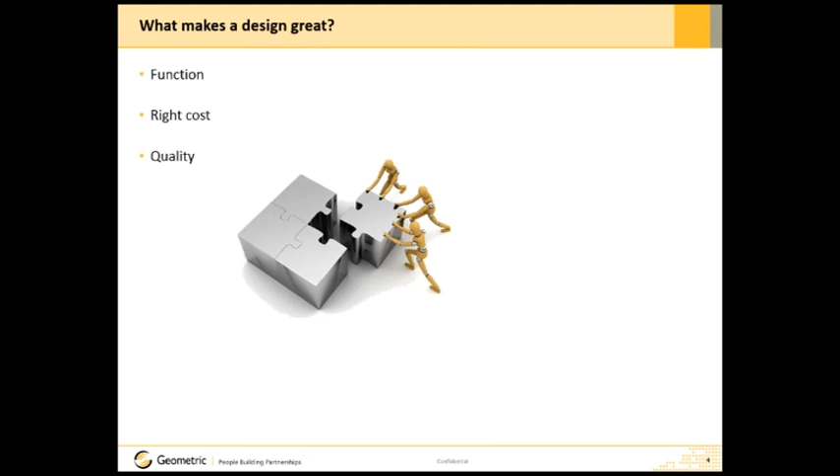Generally, quality is based on perception, but it should also be endorsed by the customer. It should definitely be efficient—better than the existing method, and it should save time. The next aspect is also about safety and things like reliability.

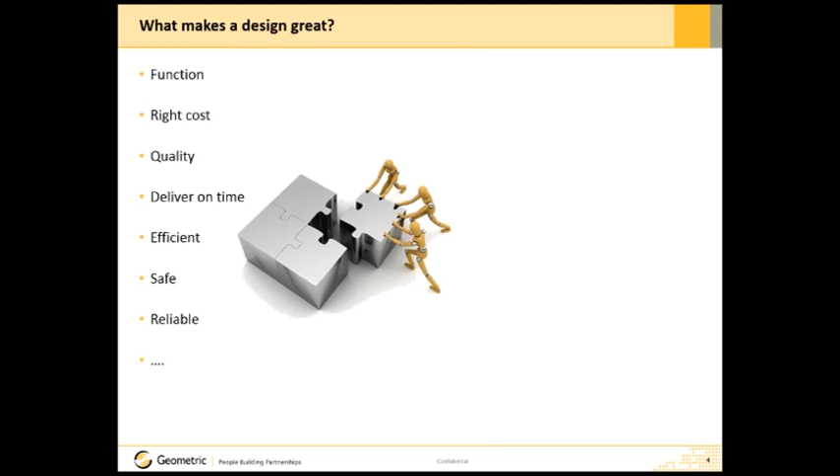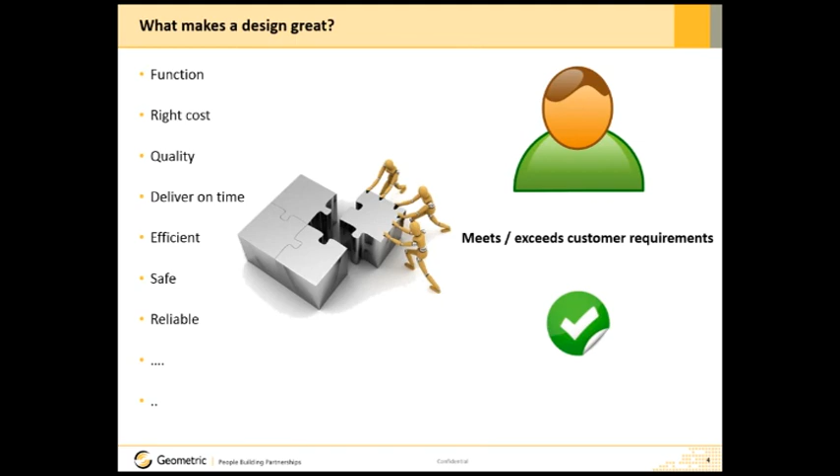This way, we can build in various parameters to make a product successful. But at the end of it, a successful product is nothing but one which meets or exceeds the customer requirements. And in the next slide, we are going to see that these design requirements are further converted—you can add further parameters to the definition, but it means you must meet this customer expectation. These are nothing but prerequisites for any design to start.

Generally, these requirements are captured by sales and marketing and provided as input to design. A designer's role is to transform these customer requirements into a functional product. But a designer has to spend a lot of time looking at various aspects of the design and validating these designs manually.

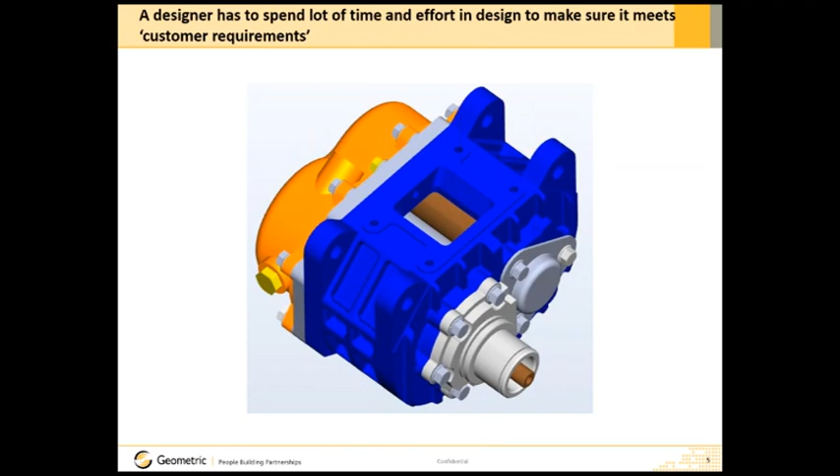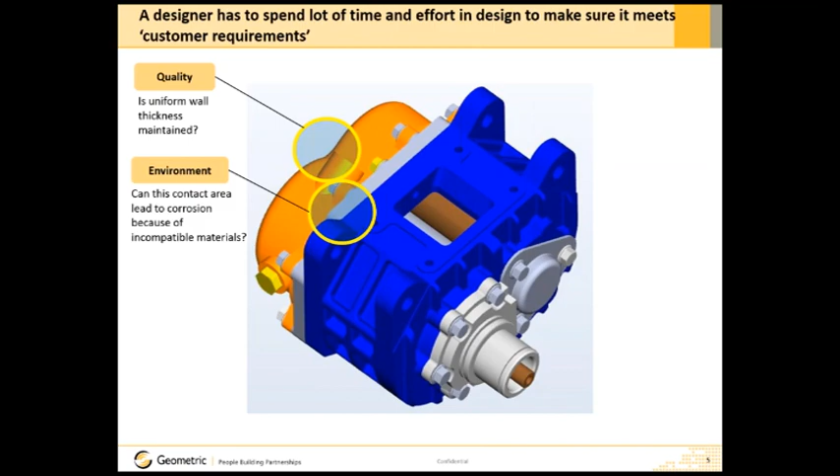Now, if we look at some examples—for instance, the picture on your screen, in this assembly, the question could be around quality. For this particular part, the question is whether there is a uniform wall thickness maintained for this part, which needs to be cast. Similarly, is it meeting environmental requirements? Can this contact area lead to corrosion because of incompatible materials?

It could be a question around reliability—a designer has to think about reliability. Is the thread engagement sufficient for the joint? Will it be reliable in the field? Things like manufacturing—for example, can this fillet radius be achieved through the casting process?

Is the manufacturing cost within the target? Generally this is something which the designer has been given from the sales and marketing side, that for this product, this is the overall target cost you need to fit into, to make sure that it meets the end customer's requirement or the target cost.

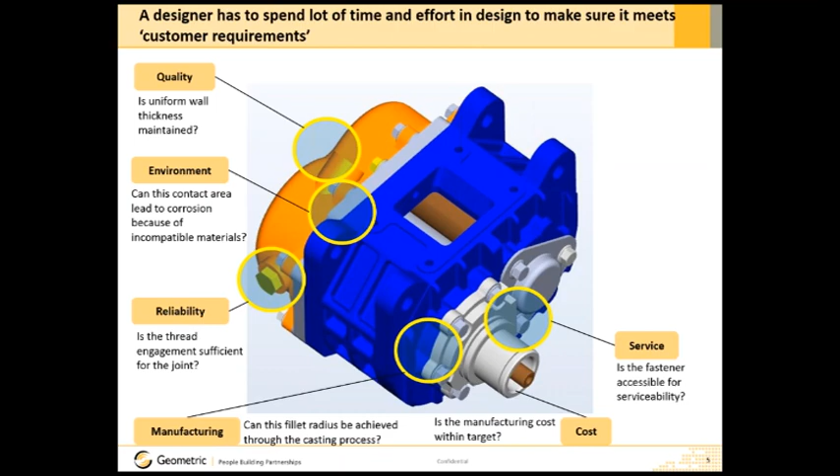Similarly, around service, here you can see there is a fastener, and the question is this fastener accessible for serviceability? The person who's going to be there on the field, will he or she be able to service it easily? Is it accessible?

Similarly, question around assembly, is this hole aligned properly? Or even on the side of manufacturing, is the correct draft angle maintained or applied on this part for ease of manufacturing?

Similarly, there is a question around, is adequate clearance maintained between these two parts to meet the functional requirement? So a designer in today's world has to look at all these things together, which makes life difficult for the designer.

There is a challenge in the design that typically consumes a lot of designers' time, as there are a lot of design iterations throughout the process. Typically these issues are difficult to detect manually and they take a long time to correct. More often than not, engineers spend around 30 to 40% of their time addressing these challenges.

We say that these design changes, or any changes in the design, come at various stages. It could come right when the product definition is frozen and the designer is working, and then there is a change. It could come during the manufacturing time, or it could come at the time of final assembly.

Generally, you go through a process of prototyping, but day by day the world is shifting towards digitization, and more customers are now going for a sort of virtual prototyping. It is not possible for certain processes to actually create a prototype all the time and try to test on it. So the biggest change happening in the industry is that more and more virtual validation of the design is happening. That creates a lot of challenges for designers.

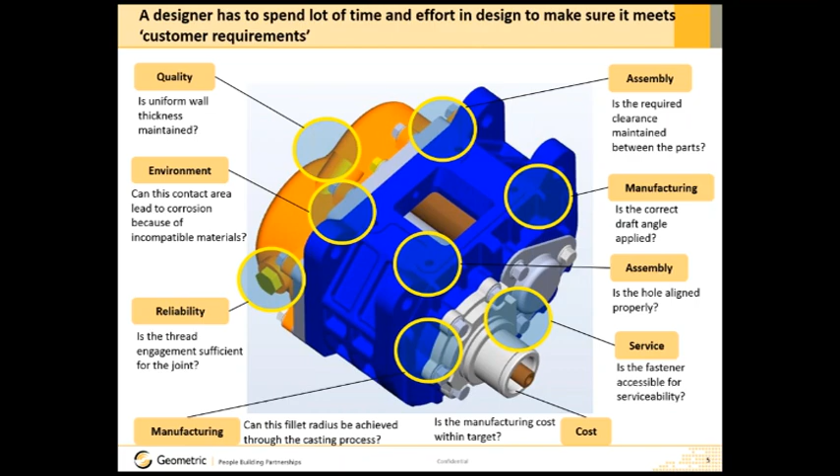The timeline required for building a new product is shrinking, and that puts the designer in a tight spot where there's pressure about everything. Pressure about cost, pressure about time, pressure about quality, and all these aspects. So how can a designer address all these issues?

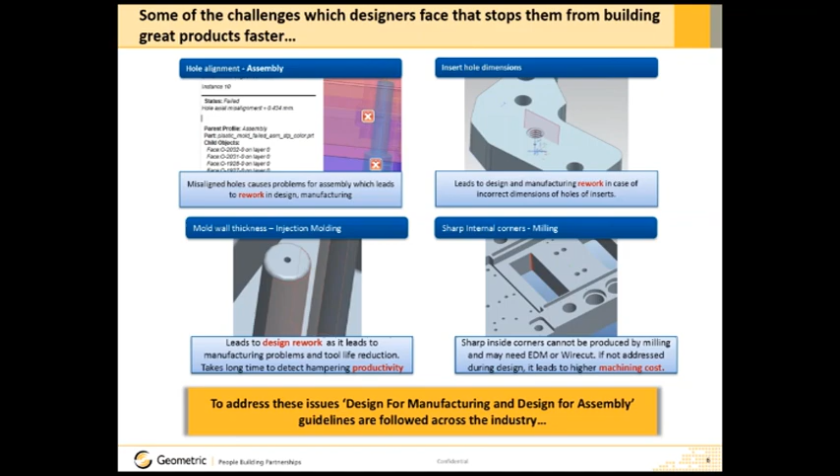Now, what happens to address these issues? Generally, an organization will have design for manufacturing, design for assembly, or similar design guidelines typically followed across the industry. Let's take a case study about one such design guideline, wherein the guideline states that a hole should have chamfered edges.

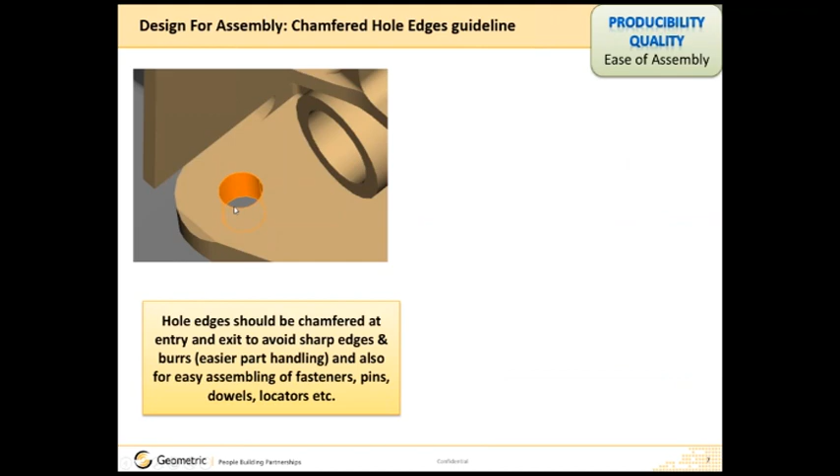So you can see there is a chamfer hole, and a common guideline for ease of assembly is that you have to provide chamfer holes to make sure that locating the fastener or locating the pin is much easier. On the right bottom side, you see an example of design for assembly, a study which was done back in Germany.

What it states is that you have a part here which has a sharp edge like that, and here also a hole where the holes are not chamfered. Now, if you put a radius or a chamfer on one of the parts, like the pin, the time for assembly goes down.

The time for assembly goes down to 86%. If you provide a chamfer on a hole, it goes down to 71% time saving, and if you provide a chamfer on both parts, there is significant time saving, where the time reduces to almost 57%. So you can see that this kind of guideline is typically available in industry.

Currently, the manual way of validating designs for such guidelines consumes significant effort and time for organizations. Most often, we see that because of late stage design changes or late stage engineering change requests, it impacts the product launch deadlines for organizations.

Some of the extreme examples we see in the automotive industry are where, because of some design issues or some of these guidelines not being adhered to, products go to field, and that's why we see a lot of automotive recalls which typically happen. Now these are some of the extreme examples wherein these kinds of guidelines or best practices are not followed, and they lead to these problems.

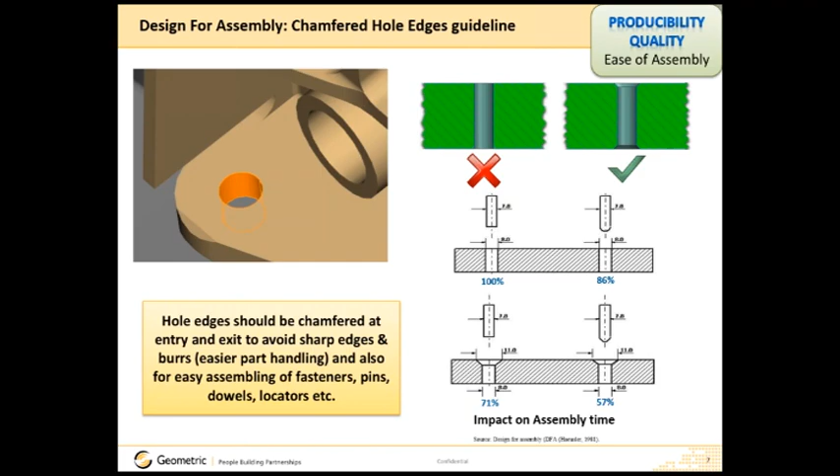Now that's where DFMPro comes very handy. So if you look at the workflow here, a designer is working on a 3D model. In this case, if a designer is working on a Creo Parametric platform, it will go and sit into that CAD system.

DFMPro provides what we call global best practices followed across industry. It helps to capture even downstream requirements which are either coming from your in-house best practices, coming from sourcing, coming from manufacturing, or even from service. These best practices are captured here and stored in the geometric DFMPro solution.

Now DFMPro addresses these challenges by bringing automation into the process. So it helps a designer to design faster and better, driven by knowledge and collaboration.

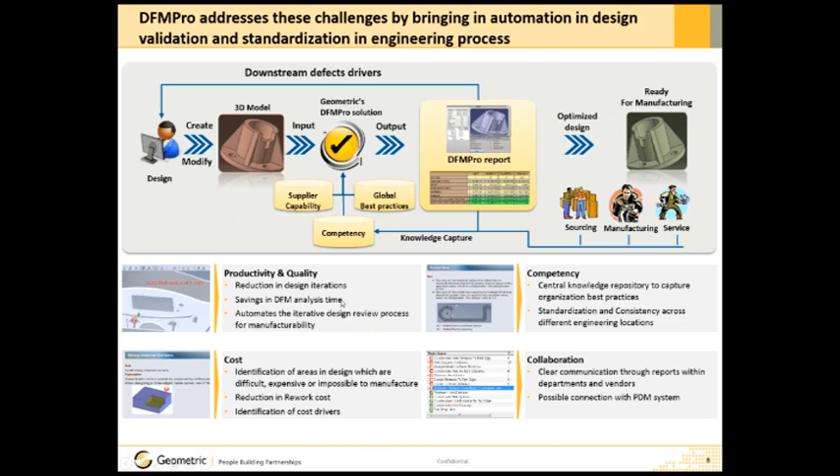Now the way it works is that, as I mentioned, it covers some of the global best practices followed across industry, and those are divided into various processes. So there are processes like injection molding, sheet metal, casting, assembly, machining. Along with these conventional processes, there are also some modern processes, like for example additive manufacturing, commonly also known as 3D printing.

There are also guidelines required for these advanced processes, and that's where DFMPro comes in as an assistant for a design engineer to validate design right when it's happening.

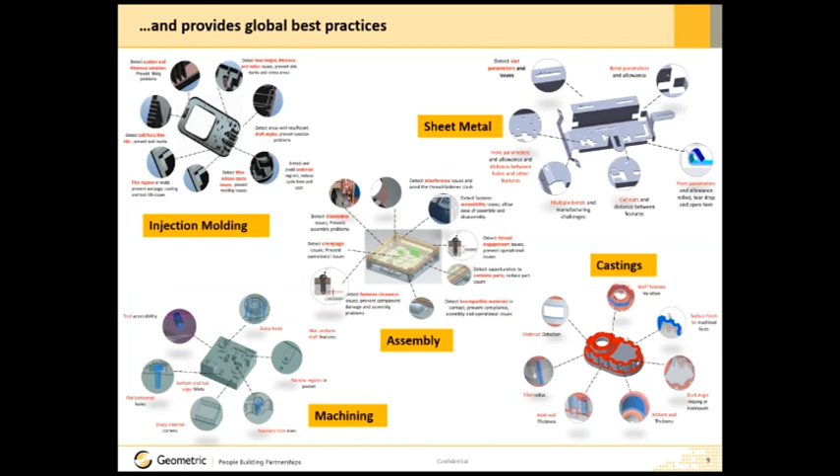Now with this, I'm going to quickly show a few examples and demonstrate how DFMPro will help a design engineer quickly validate and make sure that these guidelines are followed and the design can be created right the first time. With this, I'll now shift to a demo.

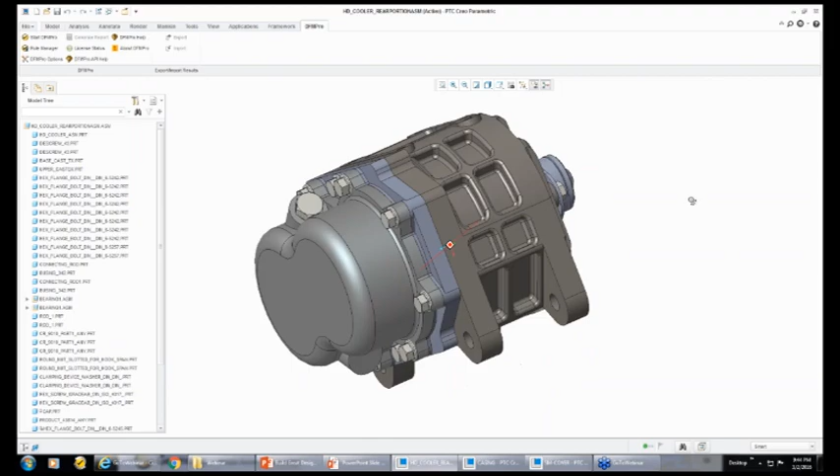Once DFMPro is installed, it will be installed as one of the menus. A designer has to click on the Start DFMPro button, and you can see that there are only two inputs which are required from a designer.

One is something called a rule file, which is nothing but a predefined list of checks. Now these are, again, as I mentioned, some of the global best practices followed across the organization, which could be further configured as per individual organization's requirements, or even by department, or even by geography. I'll come back to this during the second part of my demonstration.

The second input required from a designer is to pick a process. So here you can see various processes like milling, turning, sheet metal. Since I'm going to validate it for assembly, a designer just clicks on assembly and hits the run button. So with a click of a button, as I mentioned, Geometric has patented technology wherein it will be able to automatically recognize various features.

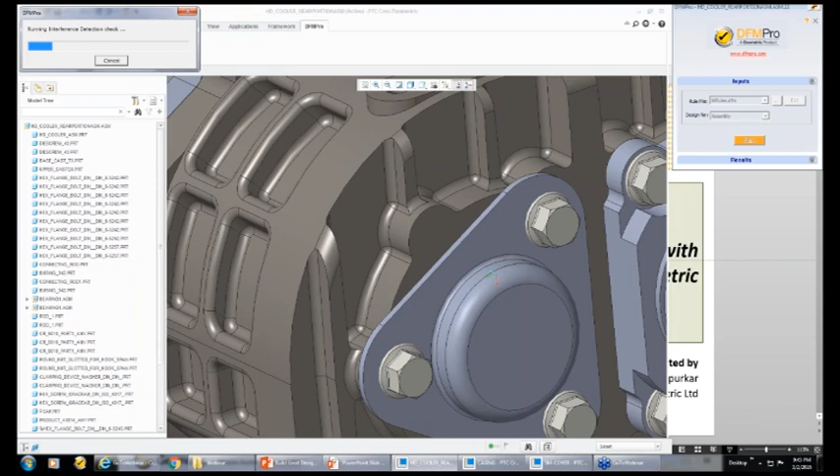Features like holes, and if it's plastic, then features like bosses, or various features on the design that are required to be validated. You can see the progress here, the various checks the system is doing on this assembly.

One interesting point here is that it's not necessary to be a native CAD design. Even if you are running it on a STEP file or IGES file, you will still be able to run these checks with DFMPro. A designer is then presented with results.

On the right hand side, you see the red crosses - those are typically the violations or examples, the components which are not meeting the standard guidelines or those criteria. The green checks are the ones where the rule has passed, and the blue ones are the ones which are not applicable.

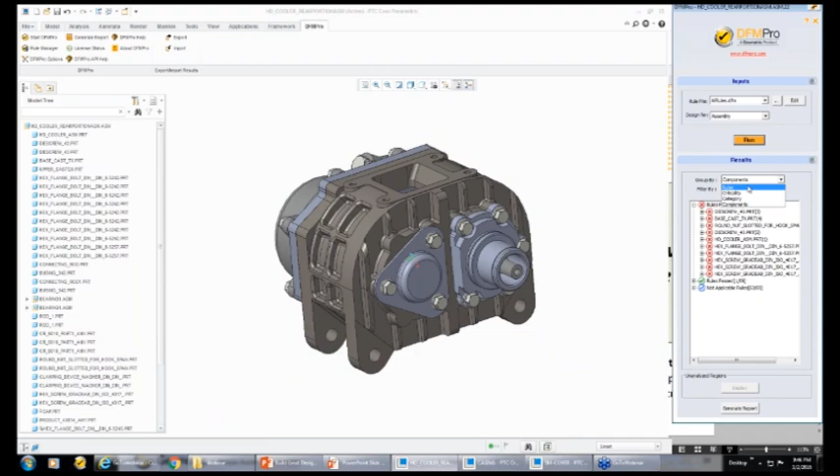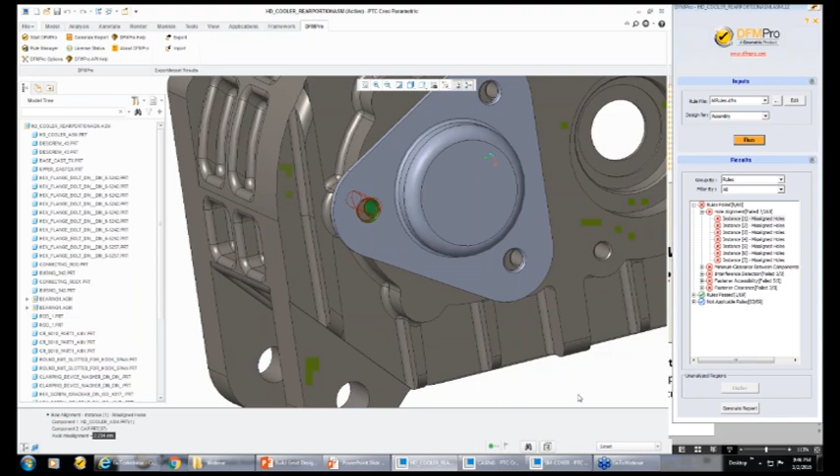For example, if I sort it by different rules categories, I can click on the root node and hit the first instance, and you can see that now it's showing one of the instances in which there is a hole misaligned by 2.34 mm. This is typically a problem because the misalignment could create problems during the final assembly process, and this needs to be corrected. As soon as this kind of issue is identified, a designer can take corrective action because you are already in the CAD environment, and this problem can be fixed right when the design is happening.

If I'm a designer, I would like to know more about this kind of check or guideline. I can just right click. There is contextual help available, and if I click, it will provide further information about that particular rule or check, showing what the hole alignment rule is all about, what parameters are required, and what feedback is given.

So here there are three types of checks happening. It is checking for the axial hole alignment, the radial hole alignment, and it can identify different types of holes. For example, holes which are misaligned, holes which are blocked, or holes which are unused. This kind of check can be very easily performed.

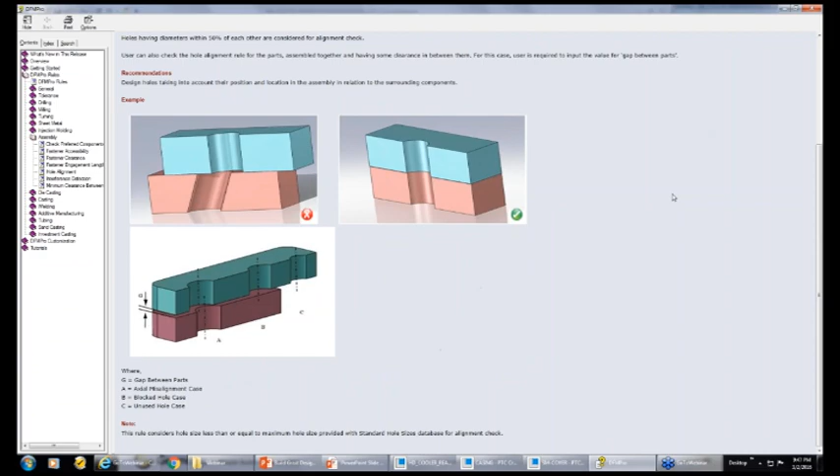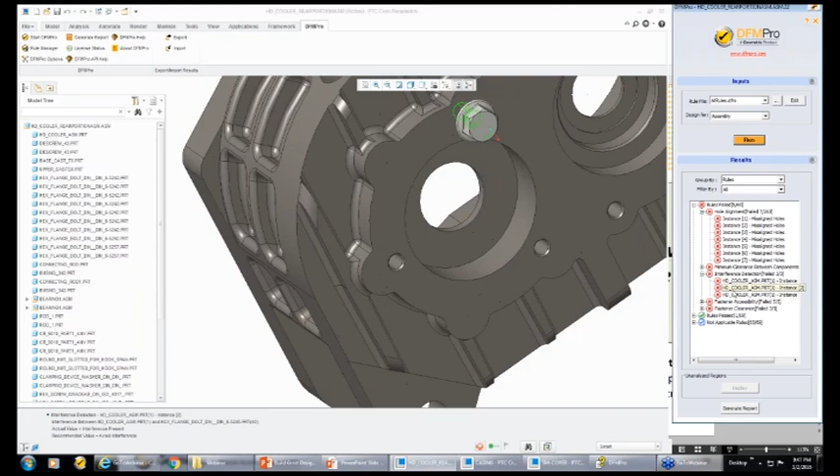Similarly, there are very interesting checks. For example, here, in case of an interference check, if you have a very big assembly, it will hide the rest of the components and show only those components which are interfering or clashing in the design. You can see that as soon as I click, it only highlights those two components, and the rest of the components are hidden.

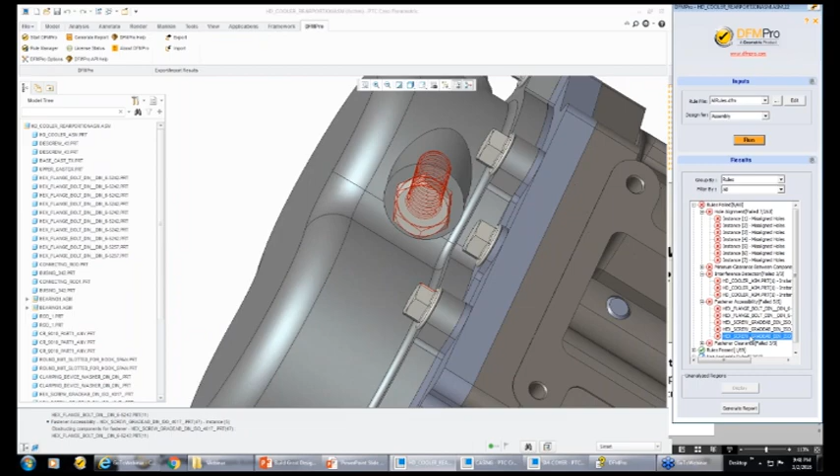Similarly, there are certain interesting checks, like for example, here is one check about fastener accessibility. If I turn the options, it will now show all the components, and you can see it is highlighting this assembly where there is a fastener and another fastener located on the other side. This means accessing this fastener could impede with another fastener, and this could create problems either during installation or during service.

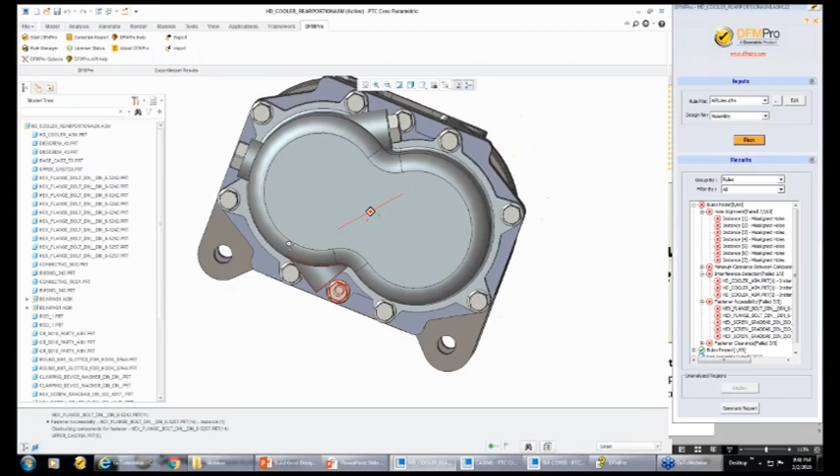Similarly, if I click another instance, it is highlighting this fastener. I can zoom, and if I take a top view, you can see that if I'm going to fit any tool here, it's going to go and hit this surface on the other part. So this could create potential issues related to accessibility of the fastener.

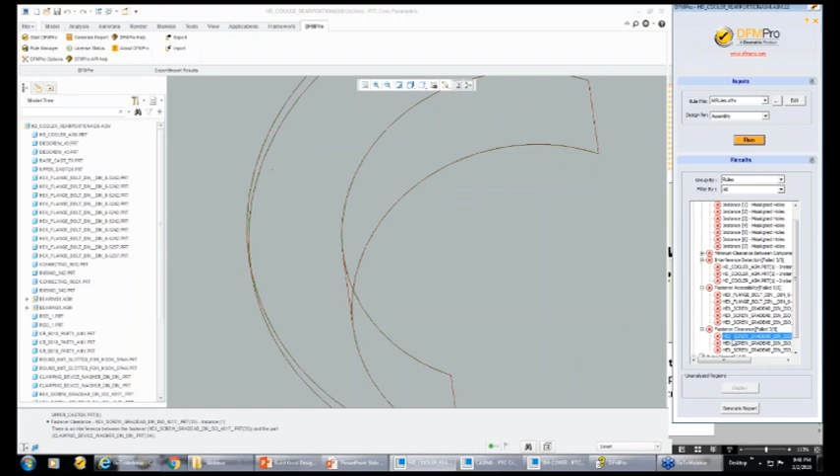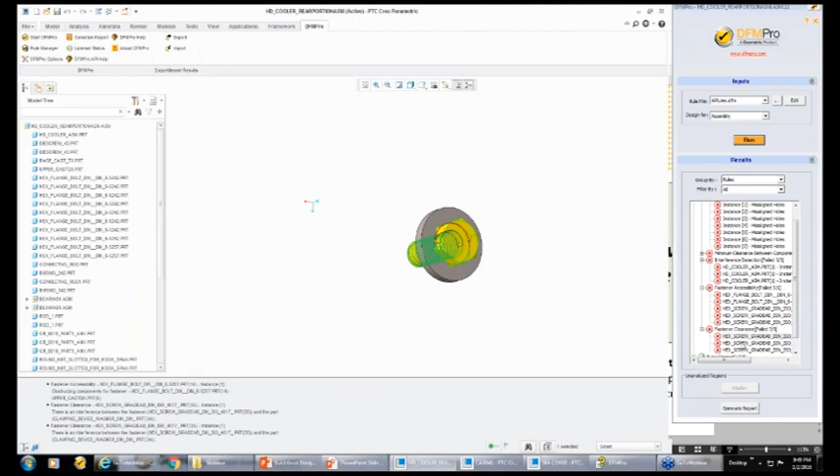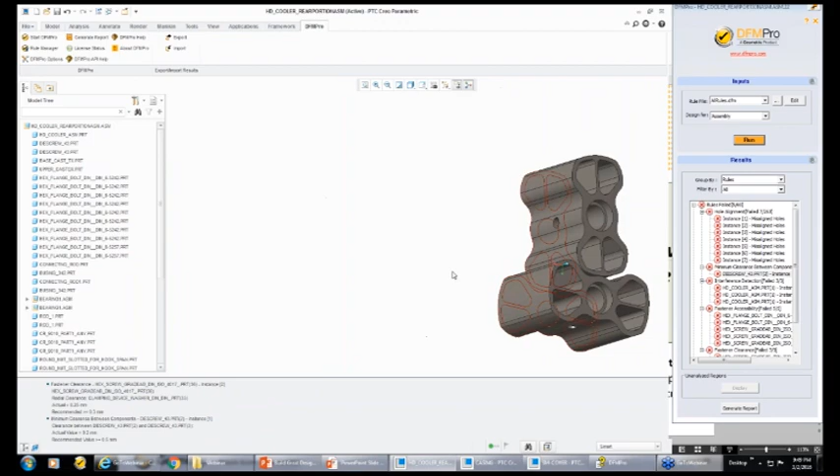Similarly, you could see other instances related to fastener clearance. Here it's highlighting one of the fasteners. Again, for ease of visualization, I can go and show only failed components. If I click on the instance again, it is showing that there is a fastener here, and it is not meeting the standard criteria for clearance. A designer will get quick feedback about what kind of fastener it is and what criteria it is not meeting. Here you can see the actual clearance requirement is 0.25 mm, and the required value for clearance is 0.3 mm. This way you can get very quick feedback about various issues related to clearance, interference, accessibility, serviceability, and so on.

So this is about the assembly module. You can also do checks on the part, like for example, I'm now taking an example of a sheet metal part. The workflow for a designer remains the same. I click on DFMPro, start DFMPro, and just select the process here. You can see there are various processes listed like milling, sheet metal, tubing process, injection molding, die casting. I'm going to take sheet metal as an example and hit the run button.

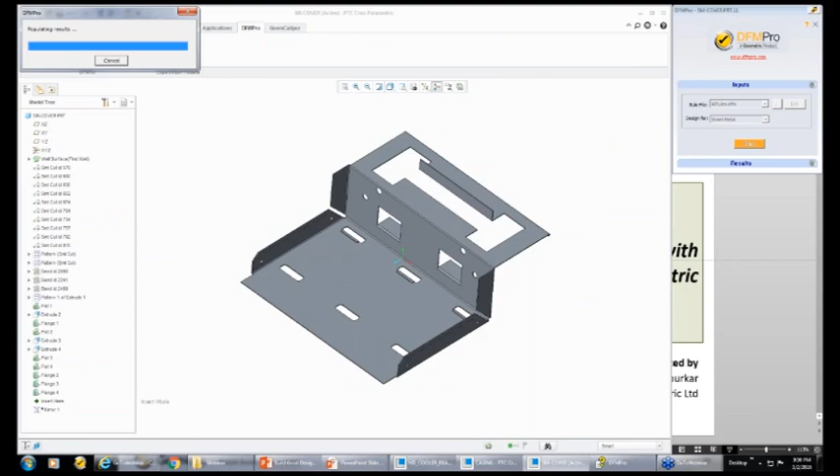Now, similar to what we have seen in assembly, this analysis is done on a part wherein the system will automatically identify various features on sheet metal, for example different types of bends, different types of holes, and based on the analysis, it will give feedback.

Now it's giving feedback that, okay, in this case there are 3 criteria which are not meeting. One example here is that the hole is very near to this part.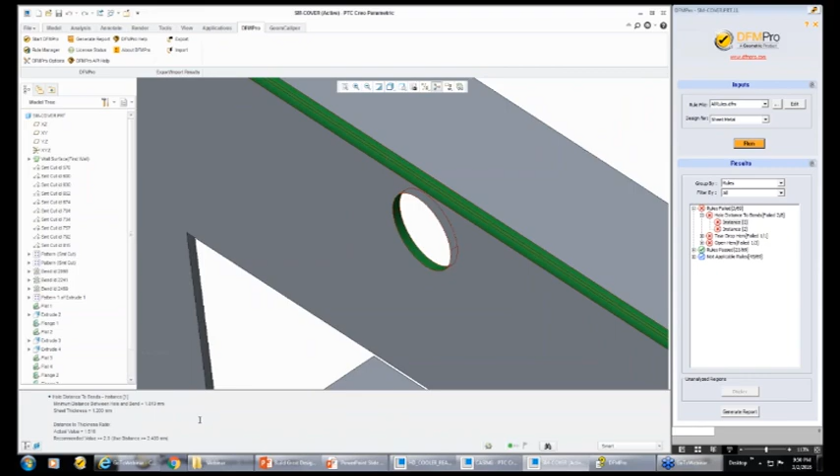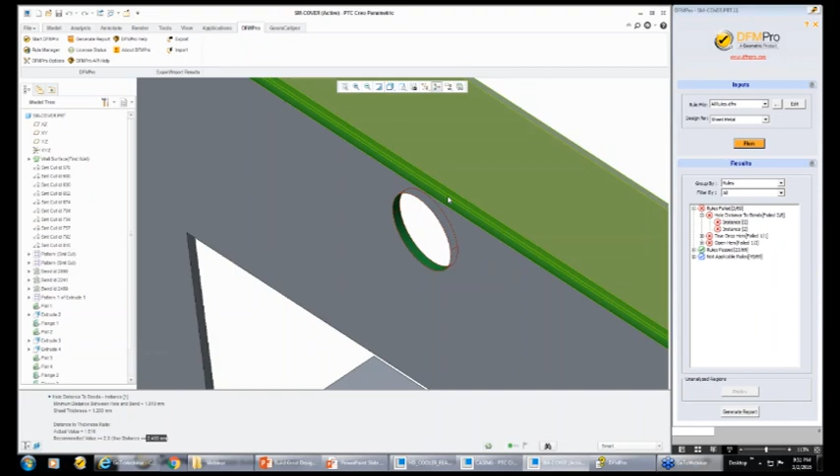As a designer, it gives me feedback about a number, like the distance to thickness ratio, where there is a hole near this bend. This ratio is currently 1.516 and the recommended value is 2. So it's also giving a solution, that this hole should be at least 2.4 mm away from this bend. It's automatically identifying this hole and the bend, and applying that particular rule or guideline in practice.

So this way, as a designer, I can take a quick corrective action, move this hole, and make sure that it meets the standards or criteria for manufacturability.

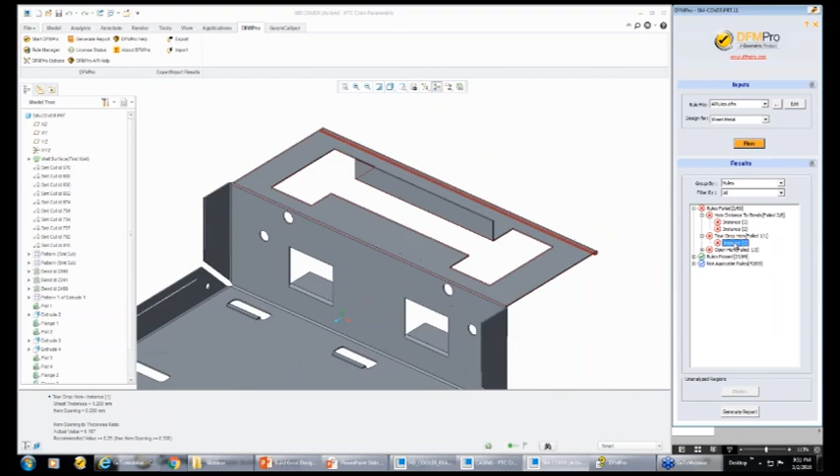Similarly, you can see it's highlighting another feature, saying that the whole hem opening to thickness ratio's actual value is currently 0.16, while the recommended value is 0.25 mm. So use the hem opening value to be 0.3.

I can again right click and seek further information about how I can design this hem better to suit the manufacturability criteria or standard guidelines.

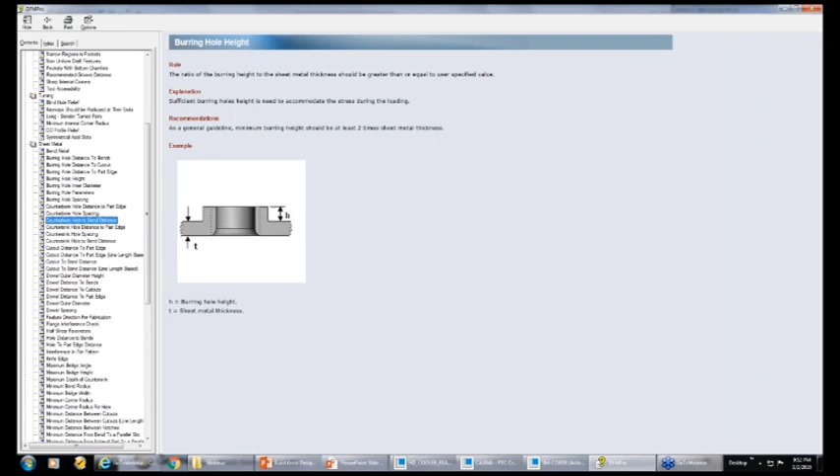You can see here detailed help is available, which provides more information on various checks like tolerancing, processes like drilling, milling, turning, and even in sheet metal, different types of bends, checks around features like burring holes, counterbore holes, different types of holes like dowels, and features typically used for manufacturing like half shear.

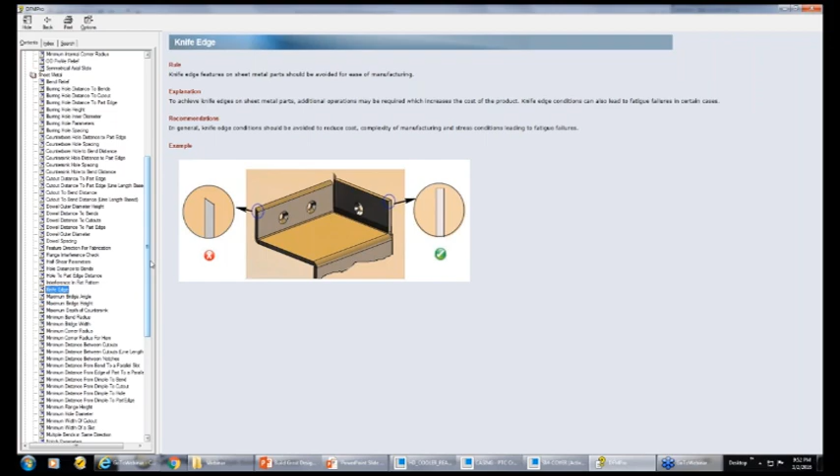Even there are some checks around safety. For example, here is a check around knife edge. This check is about making sure you don't have very sharp edges on a sheet metal part or knife feature, because it's very difficult to handle and that could lead to injury to the person working on the field.

Similarly, there are checks around flange heights, and checks around features like width of a cutout, slots, and so on. You can see there are various processes like injection molding, where it identifies checks like drafts, different types of features like ribs, features around bosses, and so on. So all these standard checks are already built into the system.

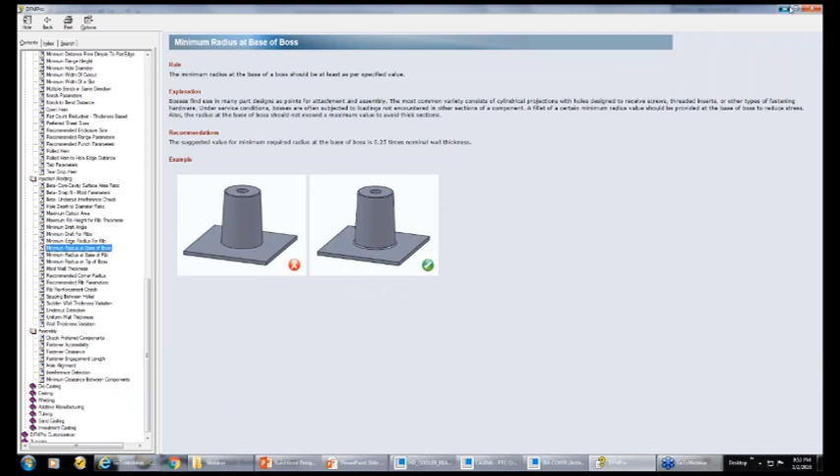It also provides an ability to do configuration. As I mentioned, you can go to the edit button and click on configuration. For example, if I'm designing an injection molding part, and there is a feature related to, let's say, a check called uniform wall thickness...

Uniform wall thickness is a check which states you should have uniformity in wall thickness for plastic parts. A similar check is also required for casting parts. The requirement is that unless you maintain uniformity of wall thickness, you're going to have a lot of issues with flows, and this could create problems during manufacturing. You'll have quality issues, issues related to porosity, and so on.

So basically for checks like uniform wall thickness, you have a complete configuration available. You can provide absolute values. This configuration is only required the first time, or typically when the solution gets deployed in the organization. You can select things like recommended thickness for materials.

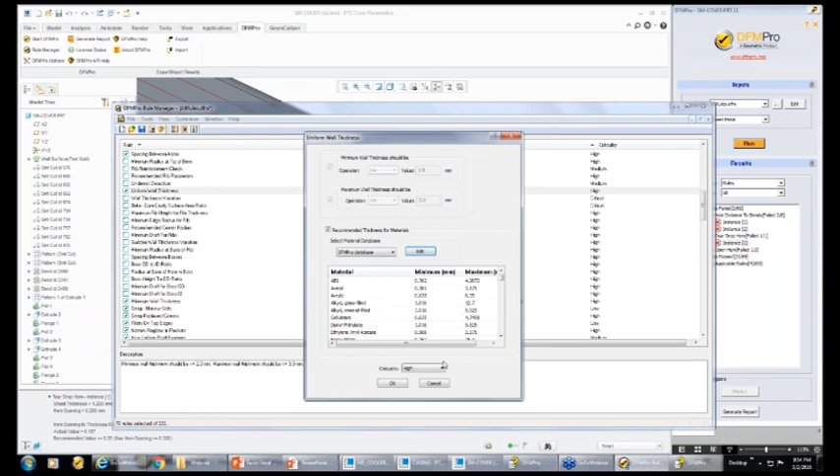You can configure your own database, add different types of material, like different steel grades, or for plastics, select different types like ABS, epoxy, and so on. It has a complete database which will automatically read the material if you've already specified it in the Creo file or your CAD file, and based on that, the particular check will be done.

So this way it provides very quick feedback to a designer on how the design could be further improved, and makes sure the designer doesn't do rework. As I mentioned, typically a designer spends almost 30 to 40% of the time on this, and all that can be very quickly cut down, so you can create a design right the first time.

I hope with this short demonstration you've got an idea about how DFMPro helps designers avoid late stage design changes and build designs quickly, right the first time.

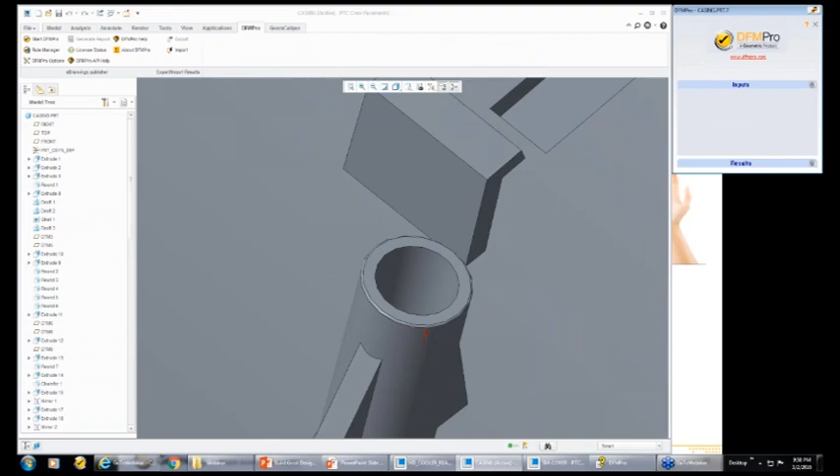And it's doing various checks, like checks around wall thickness, checks for features like draft angles, mold wall thickness. Once you have this, you can click on generate report and say OK.

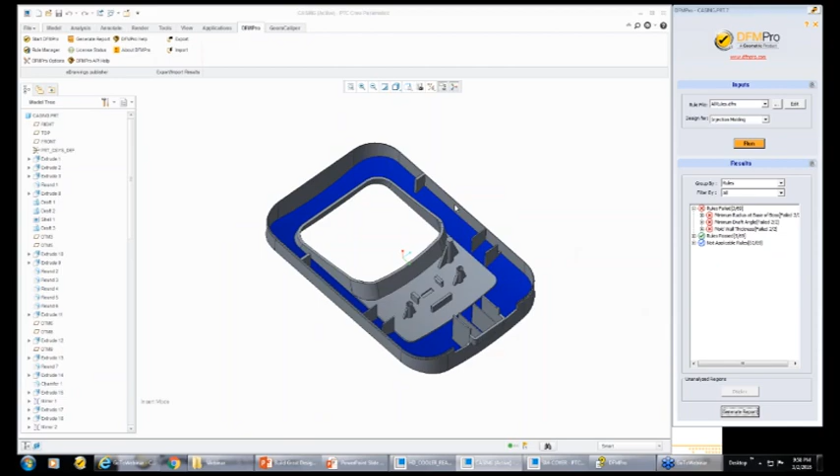Now you have three different types of reports here. One is what we call an HTML report, where it provides a quick overview. This is especially useful if you are dealing with manufacturing or supply chain where there is no CAD system available—you can share your feedback, invite others, collaborate, and share this report.

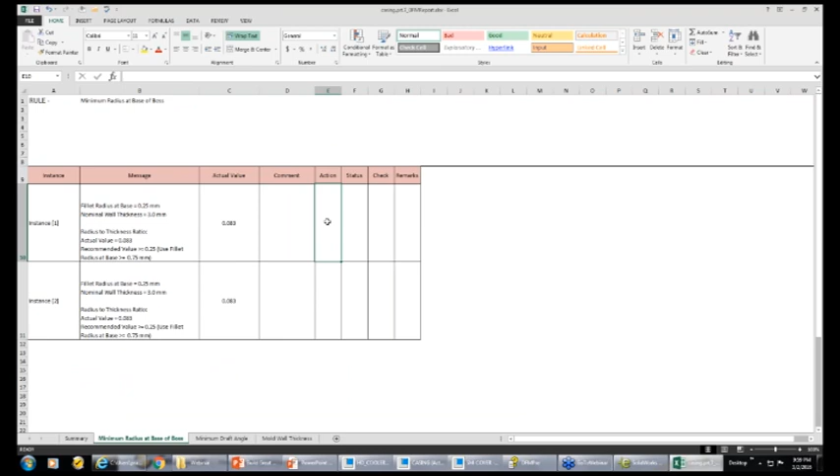For your individual tracking, you can use a spreadsheet or Excel sheet report, where you can put your own progress, any instances, any violations you see, what corrective action you have taken, what the status is, and so on. There's also a third, optional report type called an e-drawings report, with which you can also collaborate.

For example, if you click on one of the instances, you can see it highlighting a boss, showing that the minimum radius at the base of the boss is 0.25mm and the nominal wall thickness is 3mm. The actual value is 0.083, and hence the recommended value is 0.75mm. So currently the radius is 0.25, you need to make it 0.75.

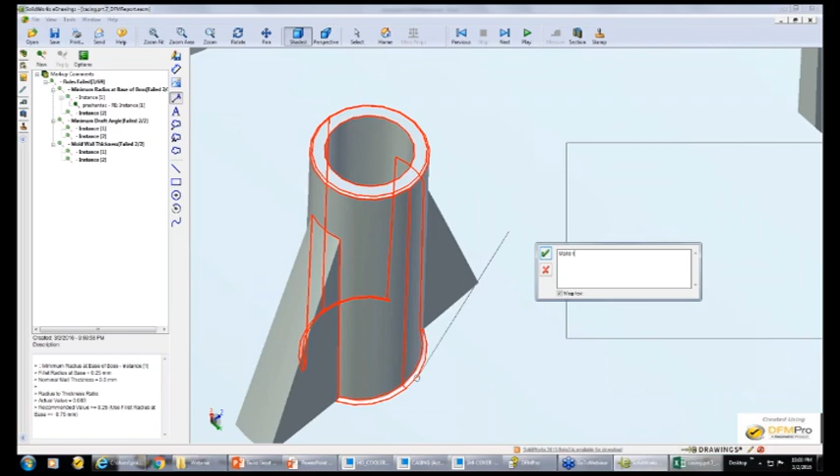You can highlight this and say, make radius 0.75. This way you can put your comments and share it with manufacturing or even with your suppliers without even sharing your original CAD file. I hope I've been able to give an answer to this question.

Next question: what other CAD platforms is DFMPro supported on? I've demonstrated it with the Creo platform, but it's supported on all major CAD systems we use—like SolidWorks, NX—you have all the systems on which DFMPro is supported.